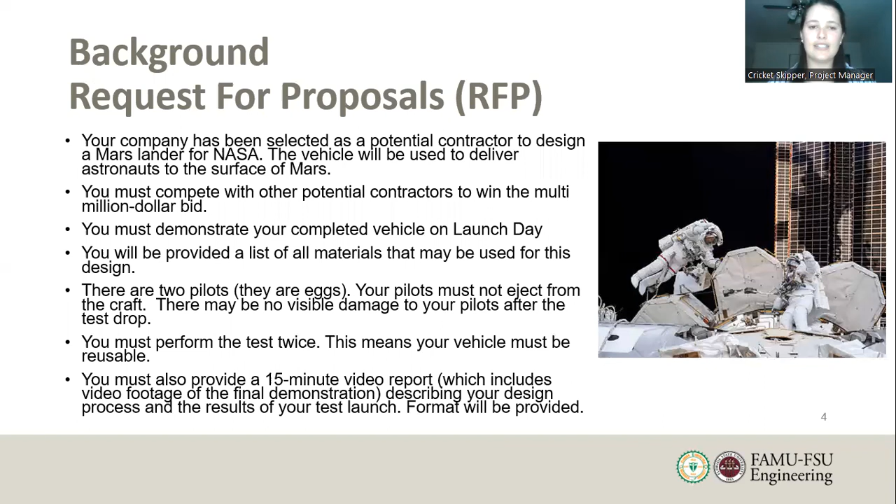This is the request for proposal given to us by NASA for the task we must complete. Given that document, we found the customer requirements, which basically sum up to: we must deliver 2 astronauts, which will be eggs, and for our test demonstrations, to the surface of Mars. The lander must be reusable, and we must demonstrate all of this during test day.

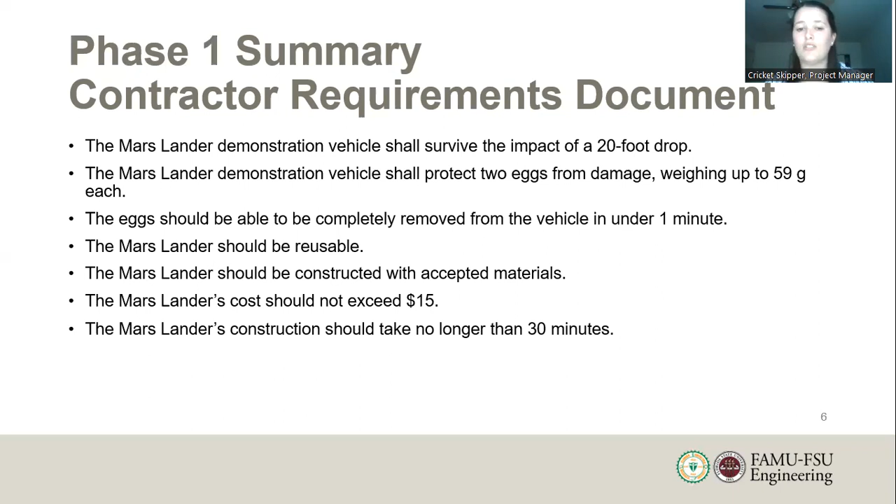The contractor requirements, after asking questions to our contractor, we found that our vehicle must survive 2 20-foot drops and protect the 2 pilot eggs from damage. The eggs need to be completely removed from our lander in under a minute and be able to get back in the lander in under a minute during our test phase. The lander needs to be reusable and should be constructed from accepted materials. We have 30 minutes to construct our lander, and the cost should not exceed $15.

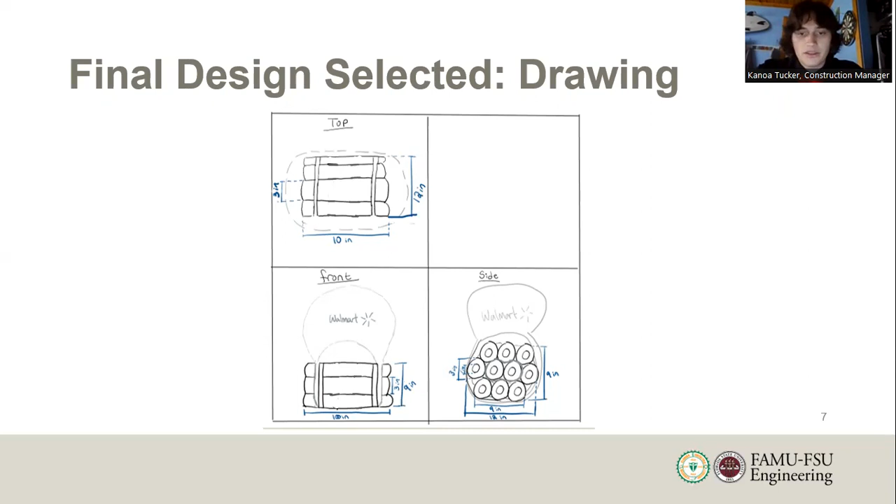So this is our final design drawings: top, front, and side view. As you can see, it's mostly made out of pool noodles, rubber bands, and a Walmart plastic bag. You can see the length, which is 10 inches, the width, which is 12, and the width of the pool noodles, which is 3 inches. In the side view, you can see the dark gray circle around the two center pool noodle segments, which represents the bubble wrap that'll go around this.

So these are our materials and the cost for them. We had 2 pool noodles, which cost $10; 1 square foot sheet of bubble wrap, which cost $2; 4 plastic grocery bags, which is $1; and 40 rubber bands, which is $2. That all came out to $15.

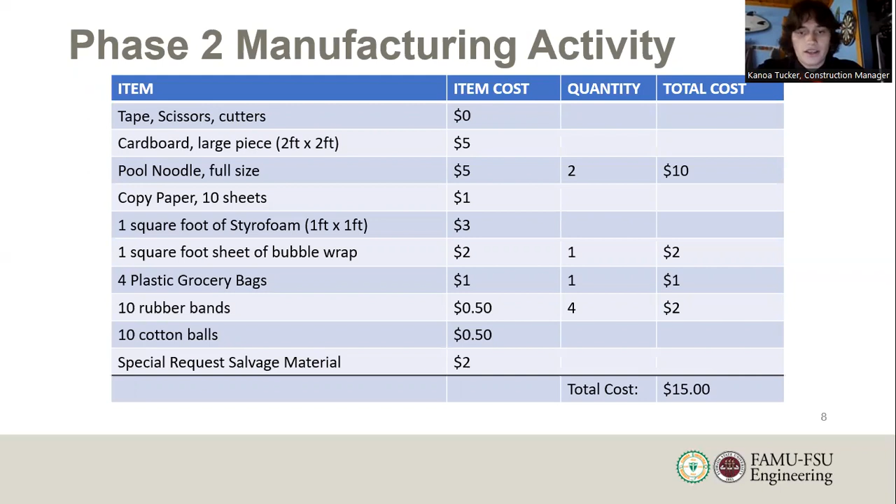So this is a picture of all of our materials, which shows the pool noodles, the Walmart grocery bags, the rubber bands, the bubble wrap, and the tape and scissors, which were provided on construction and launch day.

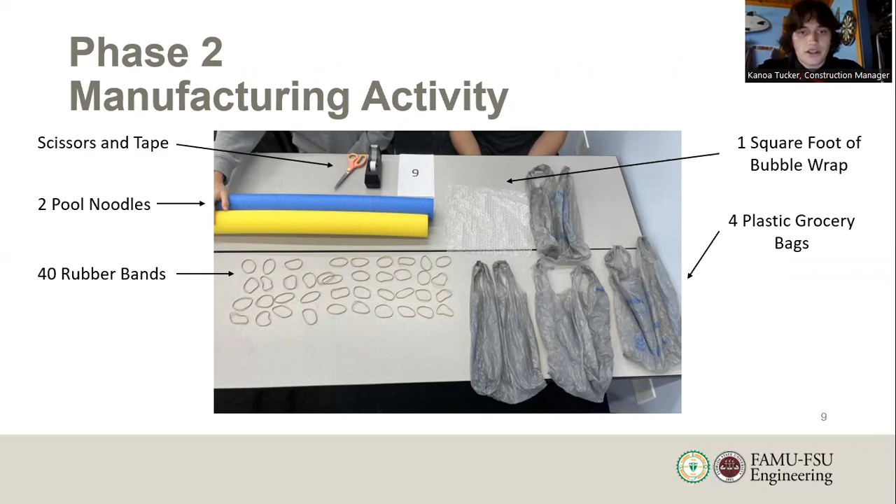So this is our construction plan. First, we started out with one person cutting 10 10-inch segments of the pool noodle, and while that was happening, 2 people worked in pairs attaching them at their ends with rubber bands, one after the other, to make a chain-like structure.

Once this was done, for 2 of the segments we would cut out a section in the middle, 4 by 2 inches, to act as a door for the eggs to be put in, and we would hollow them out if needed. After that, we'd seal the door with 2 rubber bands, one on each side of the egg, for each segment.

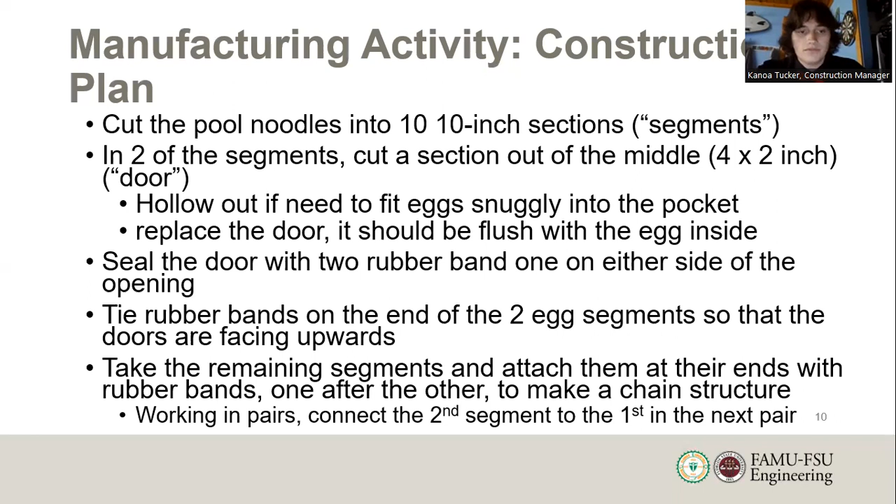This is a picture of the structure after it's all put together in the chain-like structure, but not sealed together. And these are the 2 pictures of where the eggs will be put, with the doors off of them.

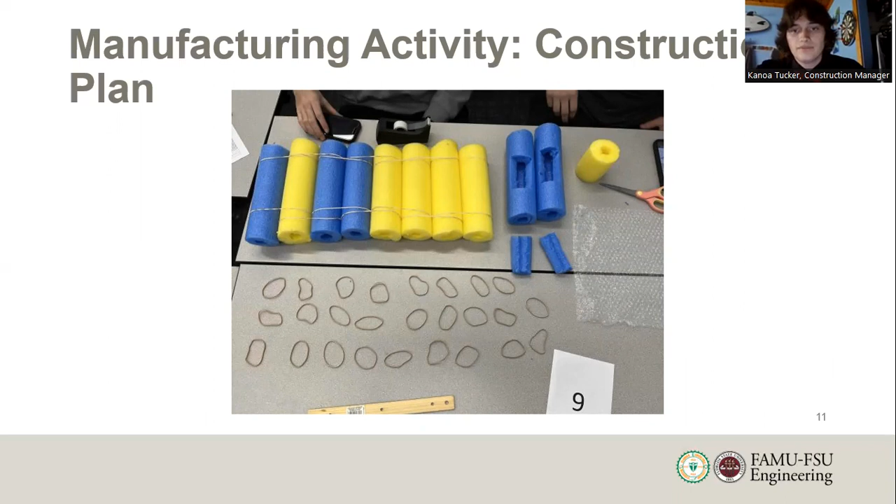After that, we line the egg segments in a layer of bubble wrap, and we wrap the remaining segments around it, the wrapped egg segments, and we seal the structure with rubber bands in 4 segments equal lengths apart. We'll place the handles of the plastic bag on the outer rubber bands of the structure to make it secure.

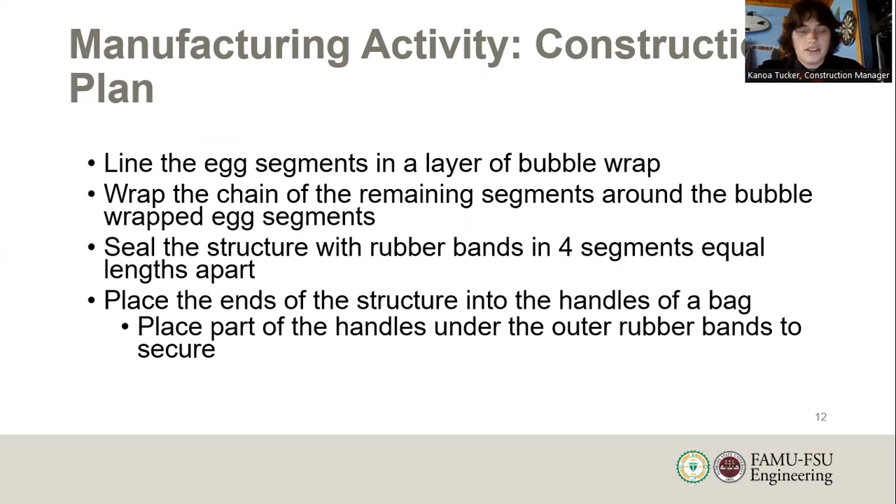Things we didn't need in the actual construction were rubber bands to further seal the vehicle, and the chain structure should actually be sealed in a circular shape. Our team underestimated the difficulty of modifying the pool noodle, the cutting and hollowing, which is hard to do with the materials provided, which was just scissors. We also had a surplus of excess materials: 28 rubber bands and 3 grocery bags.

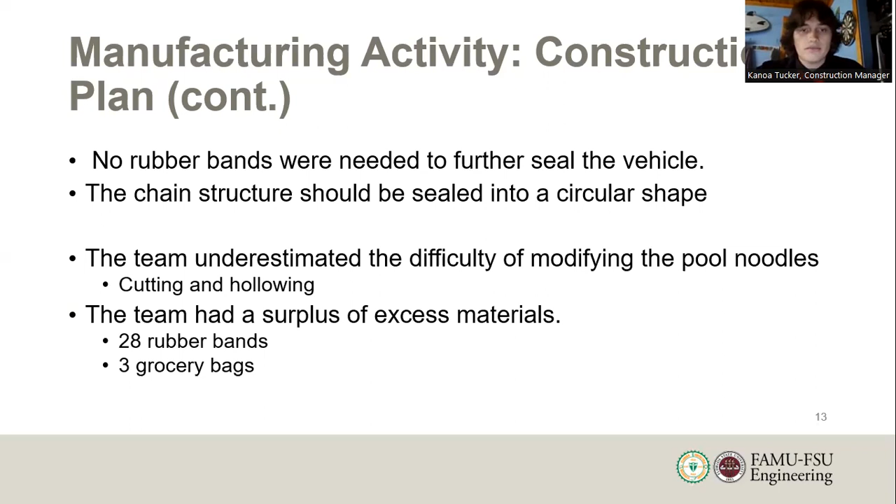So these are the front, side, and top pictures of our final design. We had 2 pictures for the front and the top to show it with and without the bag, and you can clearly see how the rubber bands are put together to seal the structure.

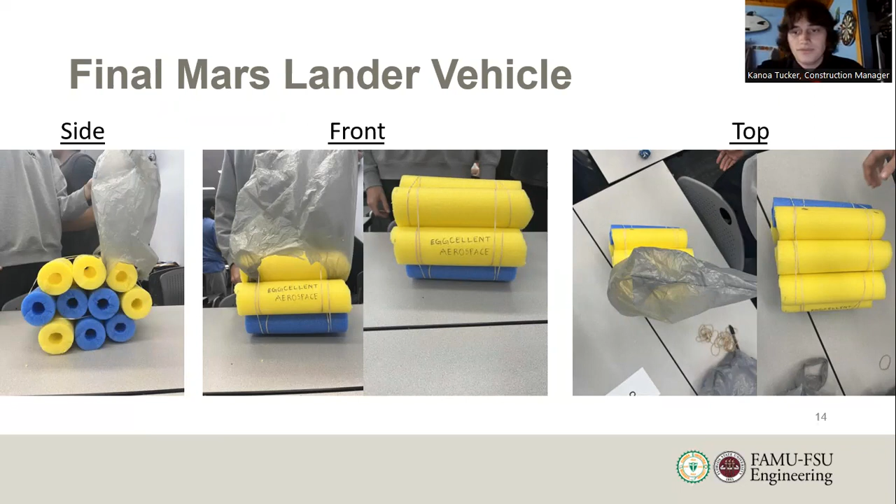Our lander vehicle test plan and results. The test location was the second landing inside the building, and the height was around 20 feet. Our lander vehicle came in to be 10 inches long, 11.5 inches wide, and 9 inches tall, but with the grocery bag as the parachute, it was 22 inches tall.

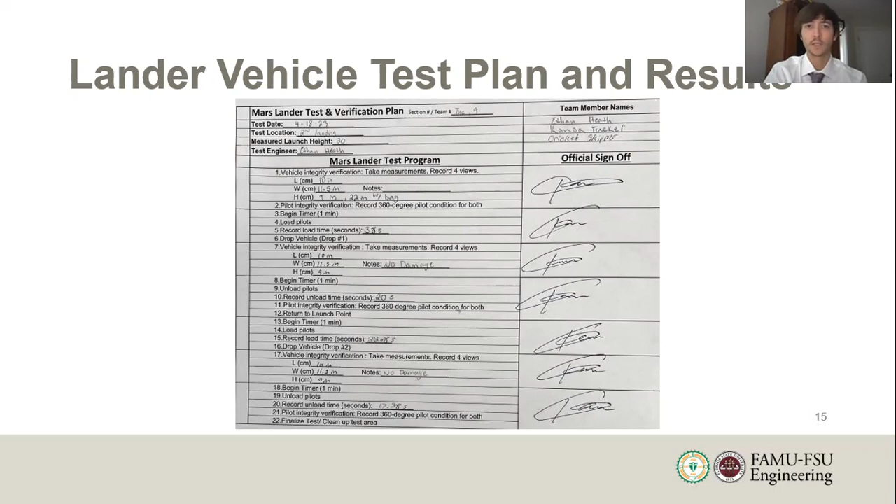All of our recorded load times were under a minute, and the vehicle for both drops sustained no damage.

We can see that in the first video here. For this one, I dropped it not as flat as I would have liked.

For this one, you'll see in a second, but the parachute, even though it's propped up, still does not catch as much air due to how big the vehicle is, and it doesn't slow the velocity down enough.

And then in the second drop, I again propped up the parachute to try and slow the velocity, but this time I made sure to drop it kind of like on the bottom where the 3 noodles would fall on the ground evenly.

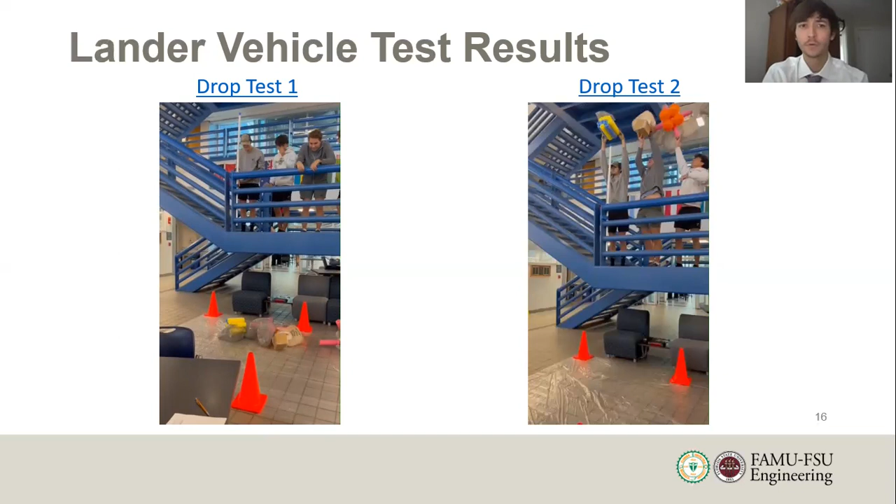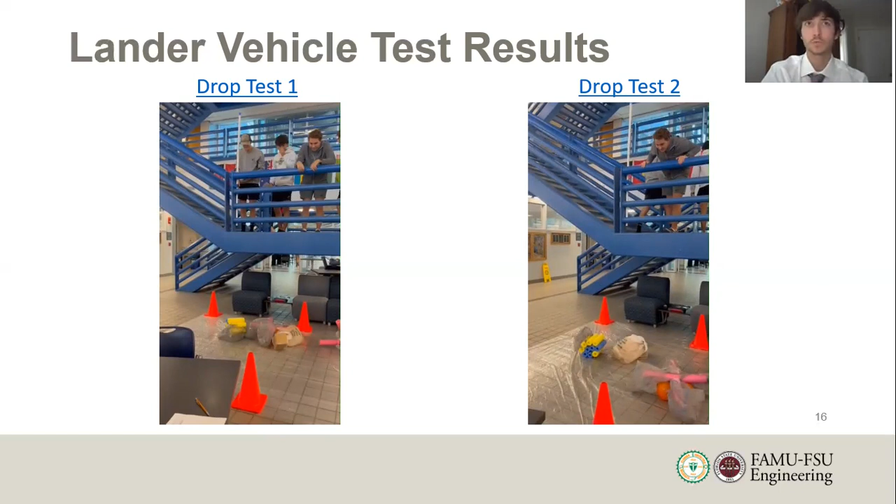Well, I guess I'll let the video play first. So in both of these videos, we see after the drop, the lander actually bounces off,

but it maintains its shape due to the durability of it, which was our prime factor. And then we did an additional drop test, but this time it was from the 3rd story, and again I dropped it like where it hit the bottom of the lander, and I tried to prop the parachute for this drop as well.

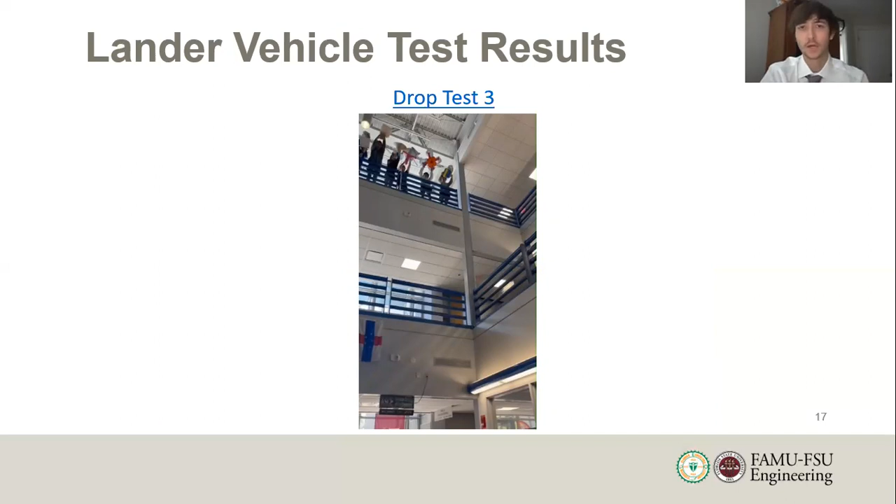And with this drop, we really get to see how heavy our vehicle is. Compared to the other vehicles, they fell at a much slower rate than ours, and our parachute did not work or slow our velocity as much as we thought it would have, and really it was just like the weight that made it drop so quickly.

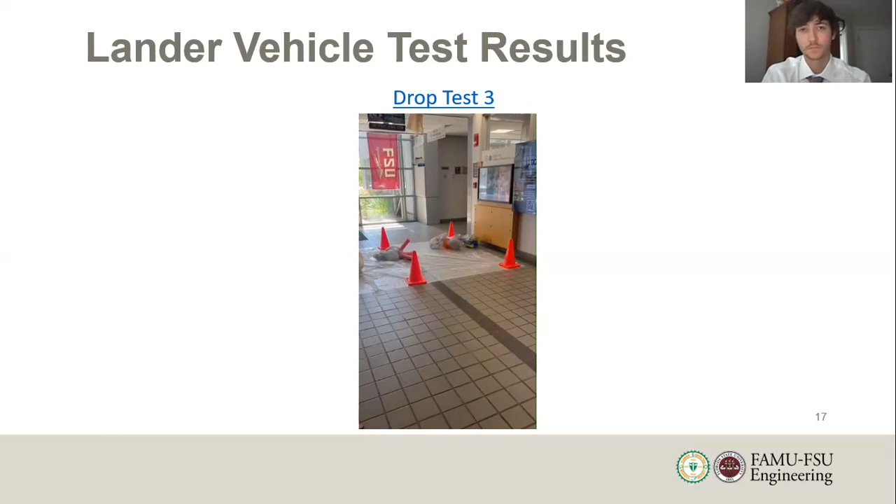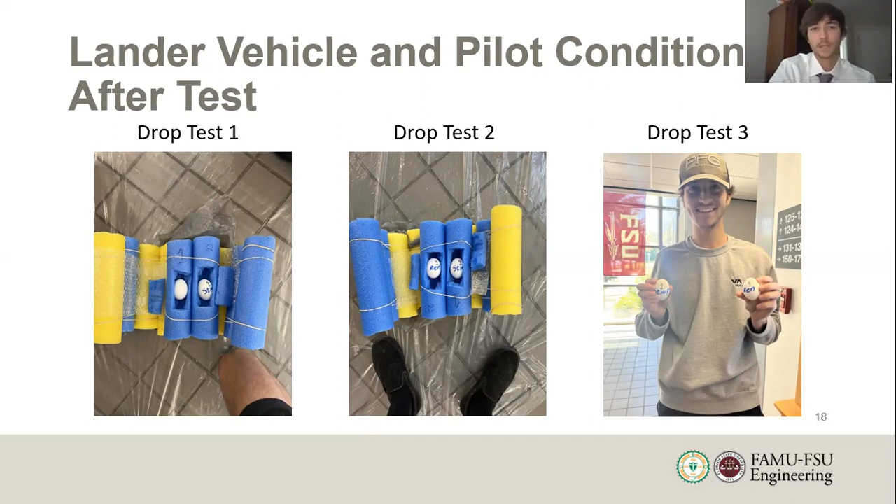So in conclusion, for the design, the team did have some likes and dislikes. The likes involved that the eggs were very secure since they were placed in separate noodles in the middle of surrounding noodles. They were very secure since they had multiple layers, and the durability, which was the team's main concern, is very well executed as proven from our test verification manager.

The dislikes was that in the preliminary rounds, we did have a function to slow velocity, and this function was not met. There are multiple possible reasons for this, one of being the lander blocked the opening of the bag, letting it not take in air all the way.

It also could have been that the handles were too stretched out, closing the opening and not allowing it to fill with air. And the final and more probable one is that the weight was just too much for the one grocery bag to handle, as we could see by the speed of the drop.

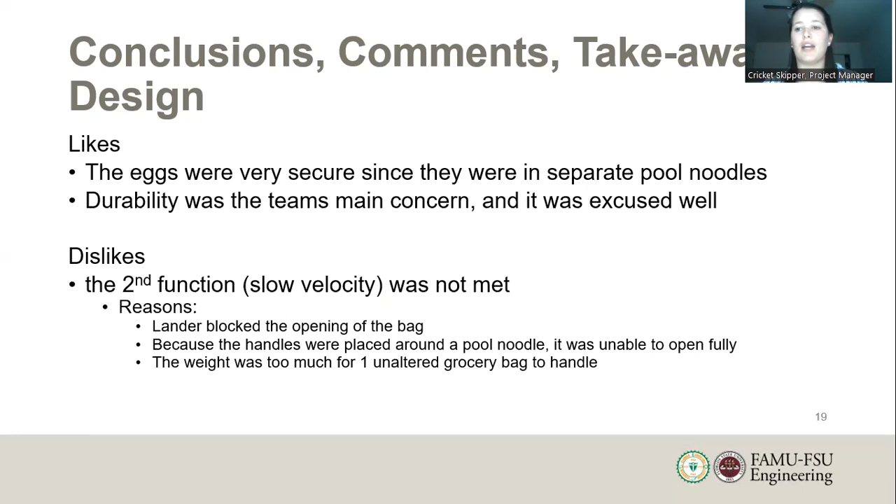During assembly, the team was able to construct the lander in under 30 minutes. As mentioned in the manufacturing plan, the distribution of tasks was handled very well, and each team member was able to help in that specific phase.

And the team also took the ease of access to the pilots for being able to get them out and in of the vehicle on time into consideration with the vehicle construction by linking everything together in a chain link structure. The team would have benefited from having more and different kinds of tools during the construction phase.

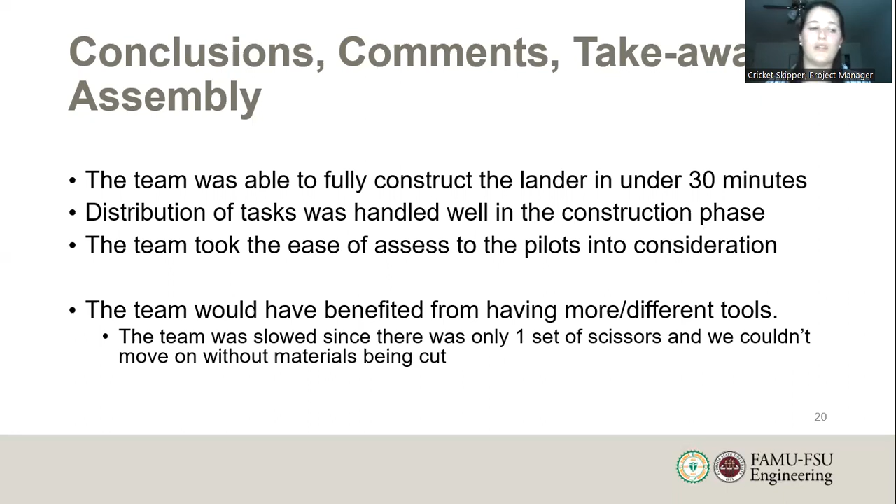Since there was only one set of scissors and a majority of the construction plan involved cutting and hollowing out, that made it to where only one team member could have really been doing the more time-consuming jobs at a time.

During the test results, we were able to see that the lander passed the two 20-foot initial drops, and we also saw the additional third story drop with no damage. This really did prove our durability in our design. We also mentioned that the verification test manager did ensure that the lander was dropped using the correct orientation.

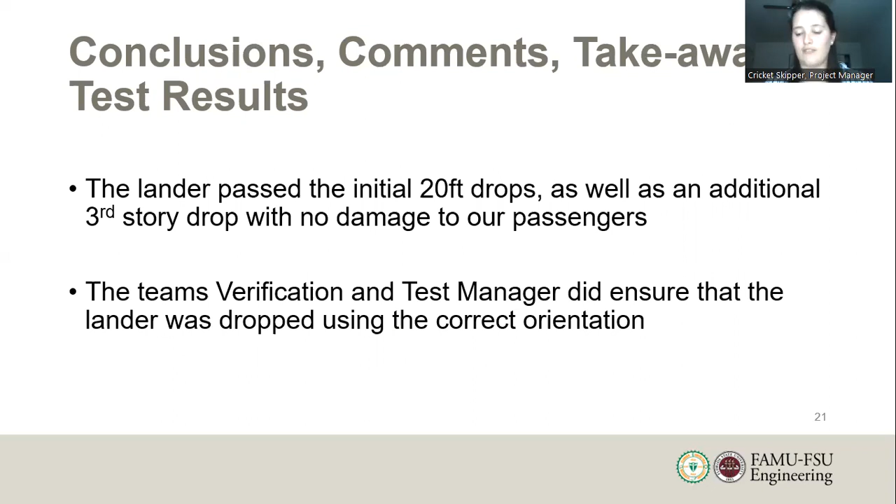And finally, our rework. So during our rework, what we thought about for the slowing velocity function, which I mentioned was not met, there are two different things that we can do for our design.

Since our durability was proven to be very strong, we have the option to completely remove the bag entirely. If this was not something we wanted to do and we actually wanted to keep the slow velocity as a function,

we as a team would need to make some kind of construction, have a bigger bag, have it be more durable, be able to catch more air, have the bag be bigger than our vehicle. That would take some more planning on a separate occasion, but that is an option if we'd like to keep the function in our initial plan.

The other thing we would do in a rework and redesign is help change the construction a little bit. The only thing about the construction that needs changing is going to be the tools supplied. Like I just mentioned, having only one set of the main tool we needed really did slow us down, considering only one person could do a main task at a time.

The scissors were also not very ideal for the task that we wanted them for. So for them to cut pool noodles, it was very difficult to get them to cut, so we had to kind of saw them. And for hollowing out, it was not ideal in that sense either. A tool such as a box cutter would have worked much more efficiently for both functions. So that is something that we could consider for a future rework of this design.